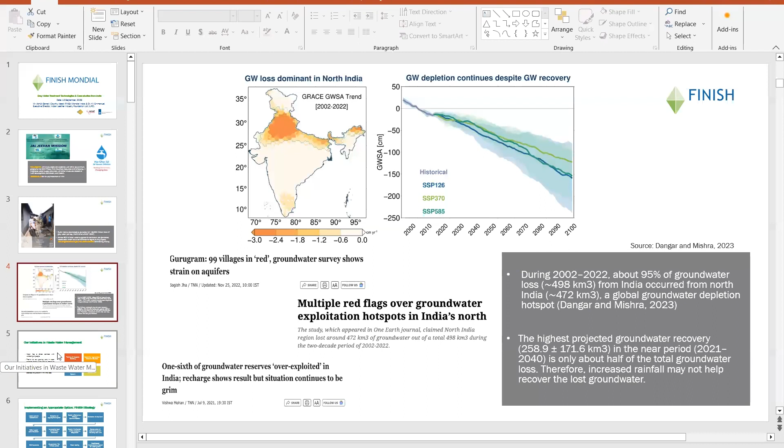This brings us to the point that this is, on the one hand, a problem, but also an opportunity for a development organization like us, Finish. With proper models and approaching the problem correctly, with the capacities and reach that we have, we can try to make some difference to the problem being faced.

So we have tried to develop some capacity building tools. We have been trying to approach this from an appropriate solution perspective. Our aim has been, and I'll quote Anand sir, from whom we have picked up whatever we know, that solutions have to be low maintenance. So we look at appropriate treatment systems, and I'll share some examples later.

Once these systems are set up, we also work on the operating and maintenance of these systems, so that merely getting the infrastructure in place is not good enough, but that it functions smoothly. Finally, we monitor the results by testing the end output, and sometimes it also requires tweaks and improvements so that the quality we get is as per the need of the customer.

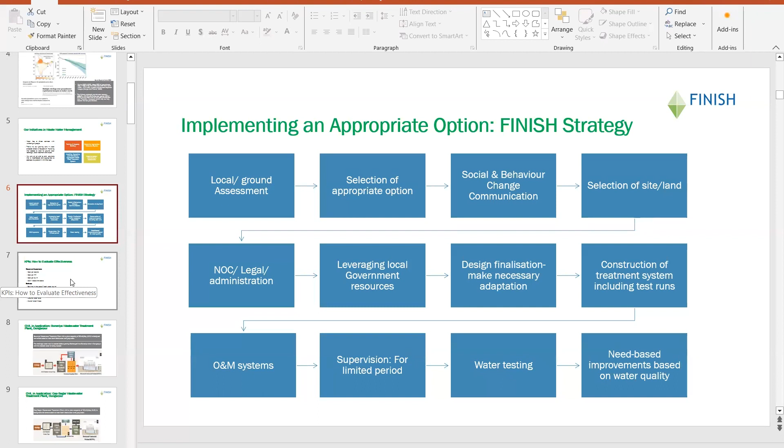We typically evaluate a project in terms of return on investment and end-use purpose. I'll elaborate particularly on this end-use aspect.

When we take up such initiatives, we try to see what the client is looking for - that is, what use the water is going to be put to after treatment. Will it be used for drinking, or for agriculture, or will it simply flow into a pond or a lake and over time get regenerated? The treatment systems we design try to keep these factors in mind.

Along with that, we also try to address the overall cleanliness and aesthetics of the project, because then the acceptability and maintenance of such units by the government and the community is much better.

This is one of the constructed wetlands that we did for Soneriya. This plant has a capacity of 50 cubic meters per day. This was one of our initial plants that we did for an urban local body - a very small municipality in Rajasthan.

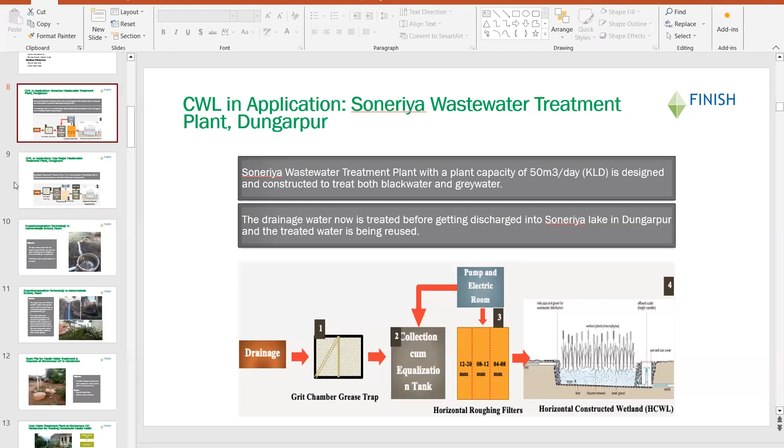Shall we move, Juhi, to the next one?

Gep Sagar was an interesting treatment system that we did. Here, when we tested the input water, we found it contained some overflow from a dairy plant. So the treatment system required some additional parts to be added. That's why, unlike the Soneriya system, which only had the equalization tank with roughing filters and horizontal constructed wetland, here we also added an aeration tank.

From there, the water flows into a secondary settling tank. And what we do is, on a periodic basis, transfer some of the sludge from the secondary settling tank back to the aeration tank to maintain the microbial load.

So this particular plant requires manpower to be present on a periodic basis, at least for this transfer of sludge, and a pump is installed for the operation of the aeration tank. So there is some kind of OPEX involved here - manpower is required.

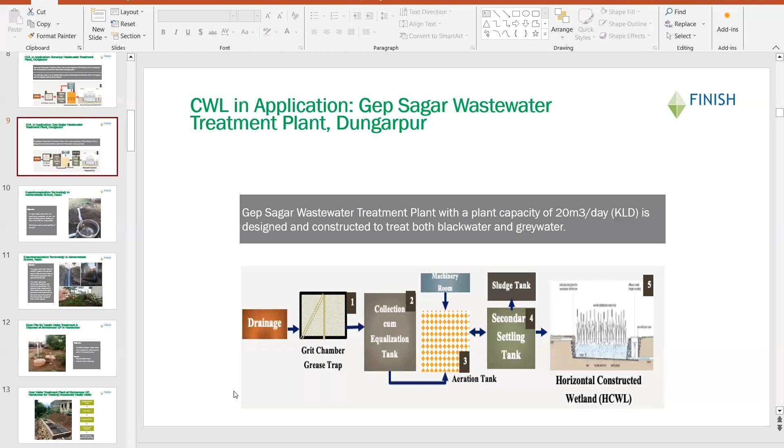Unlike the first one in Soneriya, where there is a pump but it's more easily maintained and operated - we managed to get a local shopkeeper there to help manage the operations - here, since it also entails transfer of sludge etc., the municipality had to put in manpower.

The very simple system that we did, this is a project that we carried out for the National Stock Exchange Foundation. This is a typical challenge that households in India face.

Wastewater from cloth washing stations and households tends to accumulate in most villages. So what we tried here is to put in small solutions. This is a residential school, called ashram shala, in Nasik, where we put up this particular small treatment system so the water does not accumulate everywhere, and gradually it evaporates.

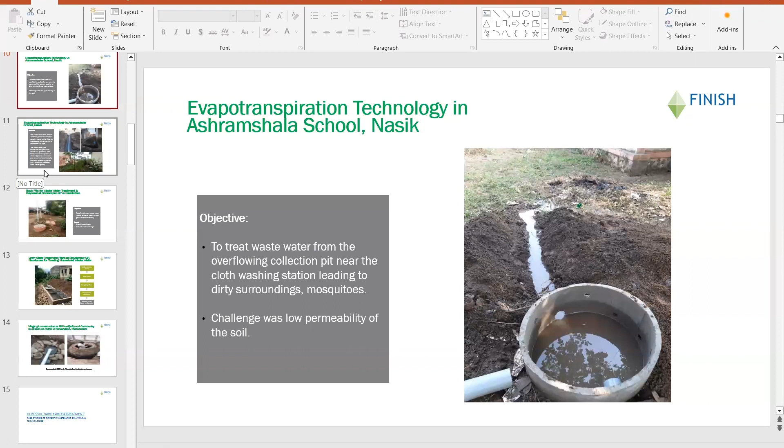Here again, the same technology: evapotranspiration, used in another Nasik ashram shala. You see the pipe, which is perforated. Since the soil there does not let water percolate easily - it's black cotton soil - the water flows out through the perforated pipe and spreads over the gravel. To aid the process, we employ water-consuming plants. Banana is quite popular and very effective, and since it also yields fruit, it's much loved by the community there.

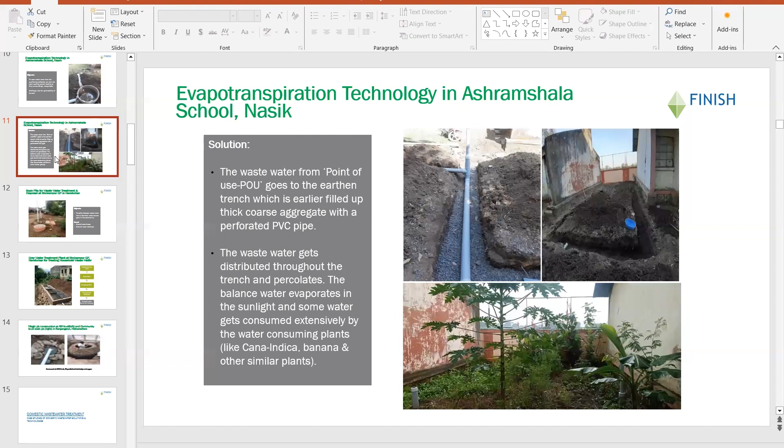Another solution, again in Nandurbar, where we did these soak pits for the hand pumps. With hand pumps, some water is always wasted and tends to flow all over the Gram Panchayat. So here we did soak pits, which take the water and ensure the area is kept clean.

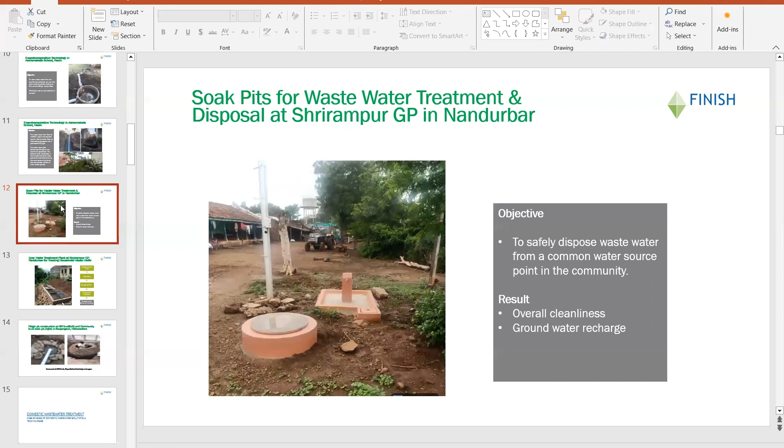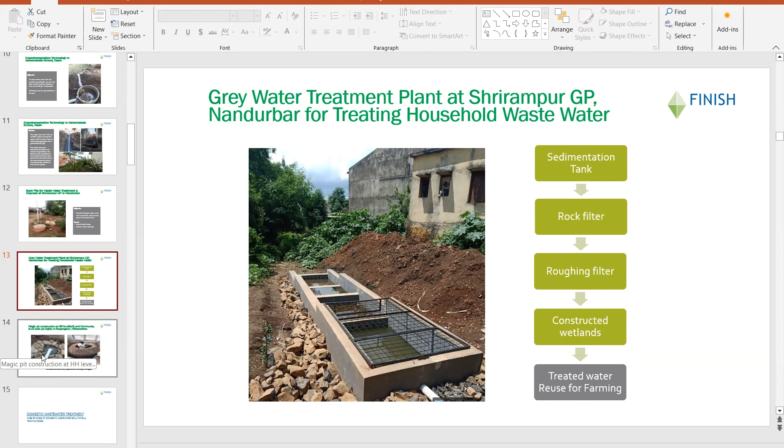Frankly, there's no magic about this, it's merely a soak pit. The idea is that community wastewater generated flows into these pits to keep the Gram Panchayat clean. This was done extensively in the project area, and under the new project - the Lighthouse Initiative - that most of my team members would be familiar with, all these solutions are quite popular and can easily be adapted in those territories.

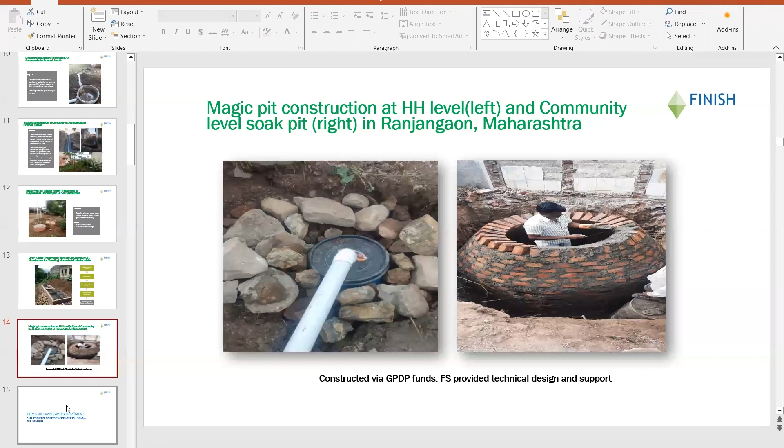I will take off from the point where Abhijit has already mentioned. Let's start with why this greywater reclamation is important - I will try to give a different perspective. As you all know, availability of water in India and in developing countries has become a major issue. We've noted that it is now a major criteria in purchasing property in urban areas. In many of our cities, locations with enough water fetch a better price compared to other areas, because water is getting scarcer and scarcer.

Many cities in India now have better coverage of sewerage networks, and I would say this has played a major role in higher water depletion. This may look controversial and paradoxical - on one hand we say we have a better sewerage network, an indication of development, but on the other hand I'm saying that has contributed to our water scarcity.

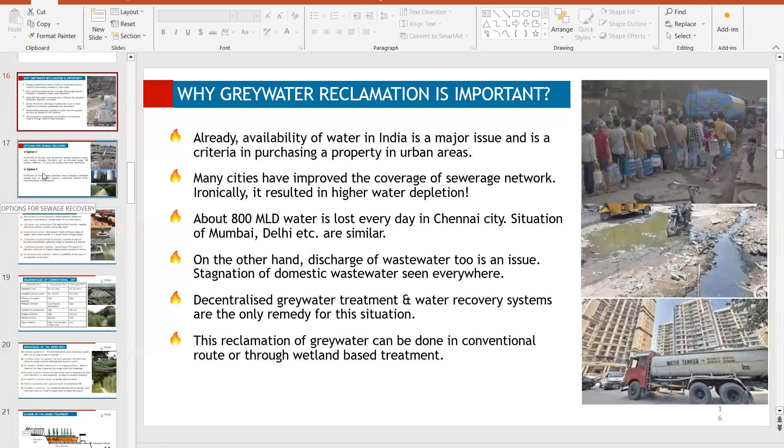So what can be the remedy? The remedy is that we need to somehow treat this sewage water and use it for groundwater recharge. There are two options. One is conventional treatment, where we have aeration tanks, fluidized aerobic bed reactor, or MBBR, and then use it back after disinfection. The second option is to go for nature-based systems using constructed wetlands.

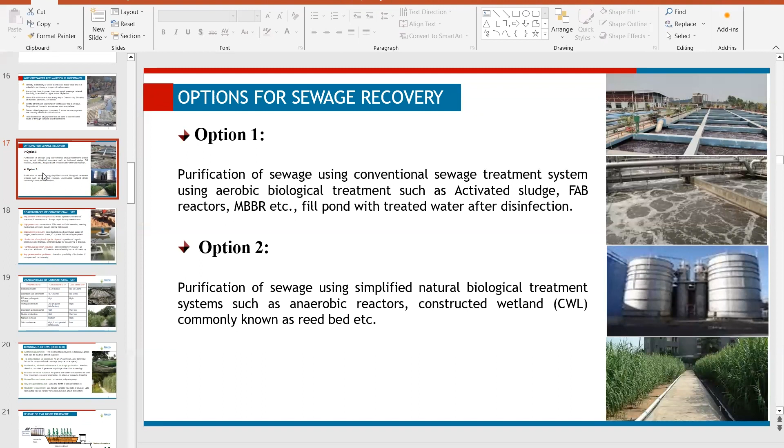So let me say, when I mention the disadvantages of conventional STP, I don't mean that conventional STP is bad in any manner, because as I mentioned earlier, most of my projects are conventional STPs. But when we talk about a decentralized level, it has a very big disadvantage, and I could see that about 80-85% of our sewage treatment plant network in India is not working satisfactorily.

This is what I discussed with our Honorable Environment Minister a month back, where we had a meeting in Delhi. He was also very concerned and showed a lot of interest in looking at appropriate solutions through nature-based systems. In fact, he wanted to try that at his place in Haryana as a model plant, which they are now currently discussing. So these are the disadvantages which we discussed.

One is that any conventional STP needs trained operators. You have to operate it completely on a continuous basis, 24/7. And also it needs aerators, artificial aeration, which means higher power cost. Another important point, which is more important in areas with power cuts and power failures, is that conventional STPs require continuous power.

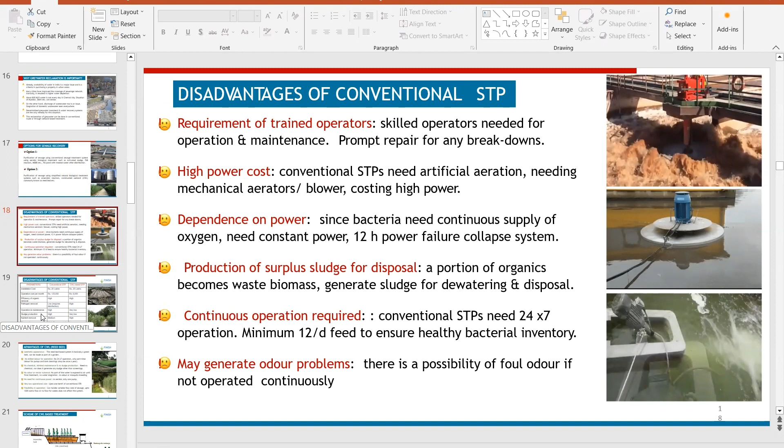If there is about 4 hours of power cut, then about 50% of the microorganisms we cultivate will die off, and it could create a major problem. About a 12-hour power failure will result in collapse of the system. So this was a major disadvantage when it comes to STP. It also produces some surplus sludge which needs disposal, and it of course needs continuous operation. And if it is not operated properly, it may generate odor problems.

So I was just saying, when we compare conventional STP with a constructed wetland-based STP, for a capacity of about 25 cubic meters per day, let's say conventional STP versus constructed wetland. The capital cost is similar, and maybe the capital cost of wetlands may be a little higher. But the operating cost difference, you could see, there is a big difference. It is only a fraction of that, and efficiency is high in both cases.

Another important point about conventional STP is that it is very poor in removing pathogens. In fact, we use cultivated bacteria in conventional STPs, so most of them need disinfection afterward. Whereas with reed beds - I may use 'reed bed' in place of 'constructed wetland' because that's a term we use very frequently - the pathogen removal is pretty high and operation maintenance is very low. The sludge production is also marginally very little, much lesser than conventional.

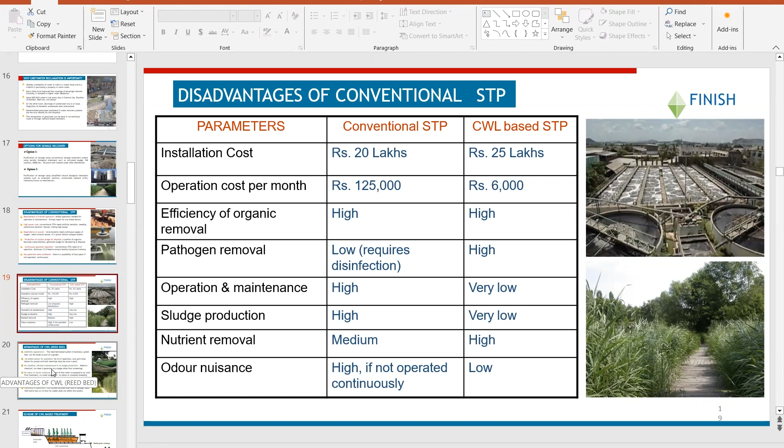And it has a high removal rate of nutrients, especially nitrogen and phosphate. This is important when the wastewater is discharged into a lake, pond, or river, where the nutrients can create eutrophication. So the reed bed is a better solution for that. And of course, there is very little chance of odor nuisance from the reed bed.

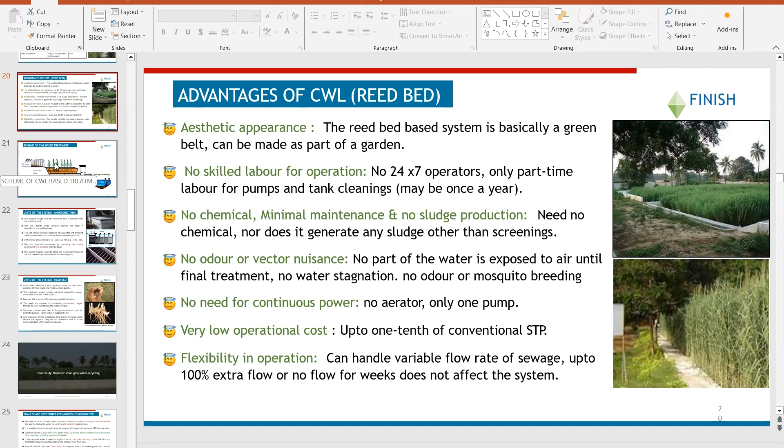Also, suppose there is a flooding, like in Chennai some 3-4 years back when there was a big flood. Many of our sewage treatment plants became out of order at that time, whereas the reed beds we constructed continued to function. For about 2 weeks it was underwater and nothing happened to it. So it is much more flexible compared to the conventional plant.

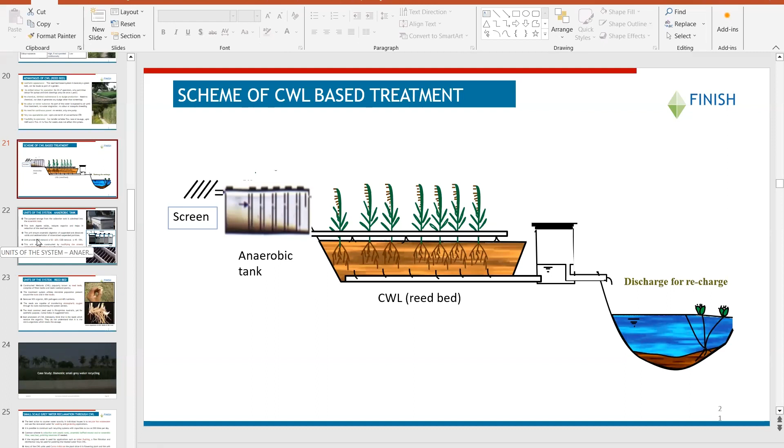So the units, as I mentioned, the first stage after the screen can be an anaerobic tank, which essentially digests the solids. The solids settle in the tank, and over a period of time they get digested.

In a normal septic tank, you need to remove the sludge maybe once in 5 or 6 months. Whereas in this kind of unit, it may take something like 2 or 3 years before you need to remove the sludge, because it gets digested over the period. The unit usually provides 50 to 60% removal of BOD and about 45 to 55% of COD.

And you can modify the already constructed civil structure, which is basically the septic tank. You can construct it as an extension.

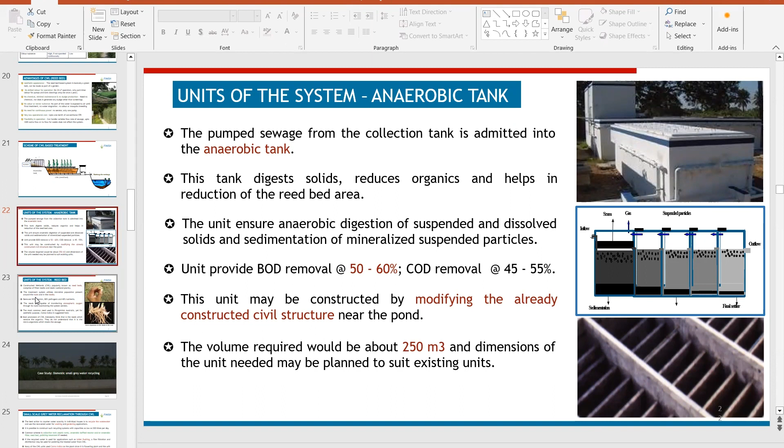The reeds are generally capable of transporting atmospheric air; through its roots, it can disperse into the water. Because of that, some aerobic condition can be maintained. We can say it is a natural aerator without using any power. It supplies some oxygen through its roots, and bacteria grows around those roots and the media.

The reed normally used, which has got the highest efficiency, is an Australian variety called Phragmites australis. But in many of our plants, we also used a flowering plant, Canna indica, which is used mostly in gardens.

One thing I would like to stress here is that many of the people who promote the reed bed also have a misunderstanding. They think that the pollution is removed by the reeds, like any plant absorbing organic matter, and that is how the water gets treated, which is totally wrong. The actual absorption of nutrients and carbon, that is organic matter, into the reed is only 10% of the total BOD and COD removed in this system.

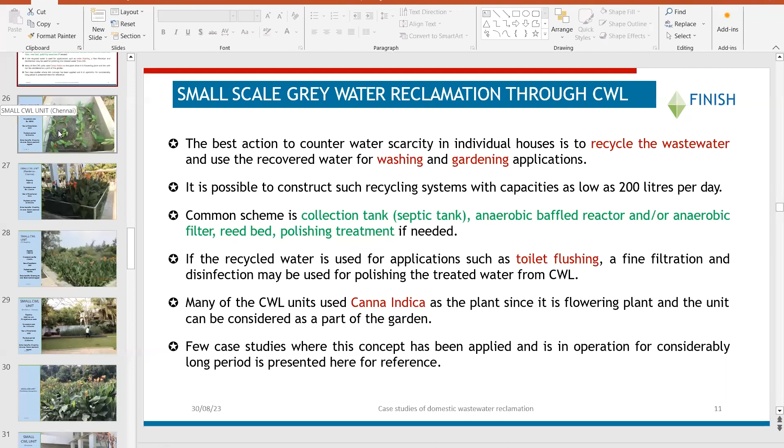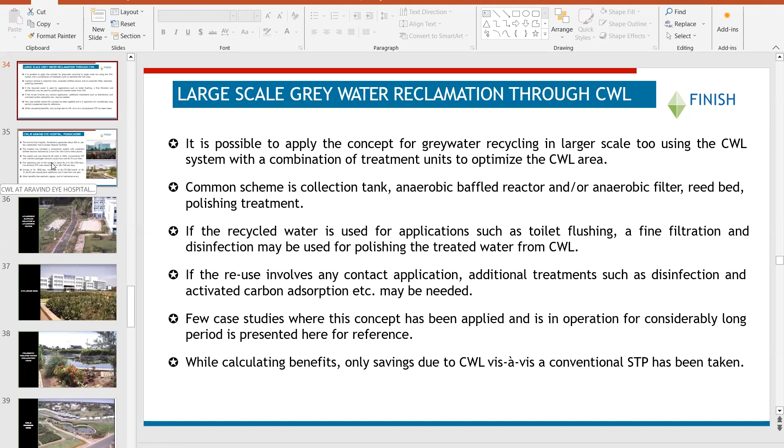Now let's look at case studies for large-scale greywater recycling. It has the same basic scheme: a collection tank, a baffle reactor, a reed bed, and polishing treatment if the use involves contact application like washing. The application proposed for Haryana by our Honorable Minister for Environment, Mr. Bhupendra Yadav, was to use this water for a temple pond where people wet their feet. In such a case, I suggested there may be a need for disinfection; otherwise we can use it as is. I'll give a few case studies, again operating for a minimum period of 10 years.

The first one is Aravind Eye Hospital in Pondicherry. It is a very large plant in terms of reed beds, treating 450 kiloliters per day of wastewater. One of the reasons they wanted to go for it is that there were no proper disposal facilities for sewage from the hospital, so they wanted to reuse it. They went for a constructed wetland of about 2 acres with Canna indica as the plant.

You can see it in the first picture. The unit was installed in 2004 at a cost of about 90 lakhs, whereas a conventional plant would have cost about 70 lakhs for the same purpose. The operating cost for this plant is about 3 rupees per cubic meter, whereas a conventional plant would cost about 16 rupees.

That means a saving of about 5,850 rupees per day, which translates into 1,75,500 rupees per month, or 21 lakhs a year, meaning the payback of the additional cost was done in less than 1 year. This was commissioned in 2004, and it has a much better aesthetic appeal.

One important point about this plant is that it was inaugurated by the Honorable President of India at that time, Dr. Abdul Kalam. Kalam was actually a faculty member in Anna University before he became president, and I was maintaining close touch with him. So when I mentioned this project, he offered himself to inaugurate it, and he did.

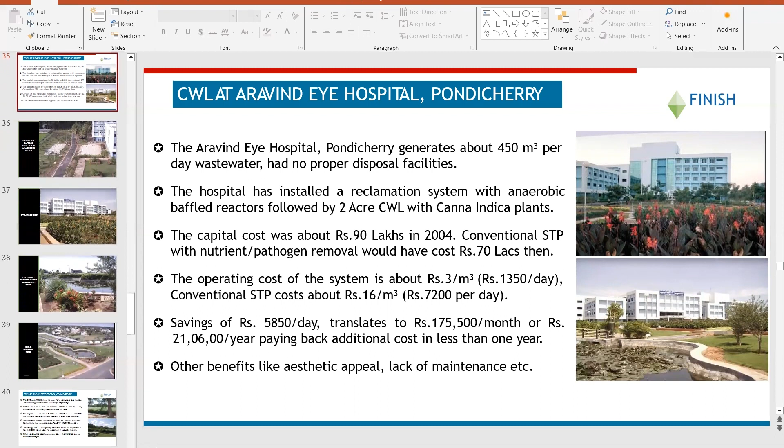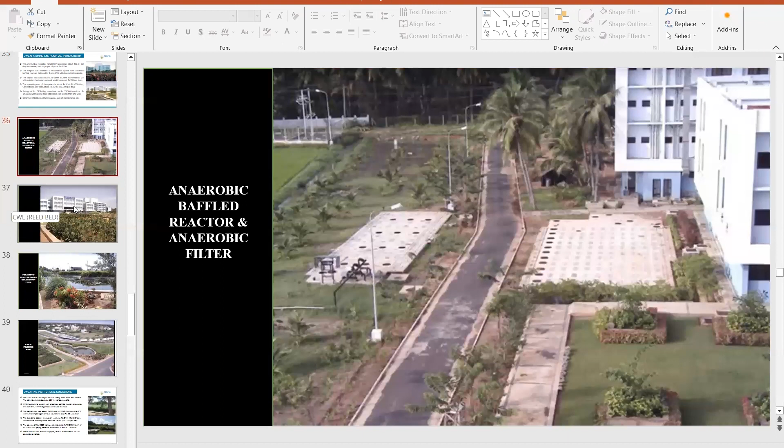Next slide, you could see a few photographs of the thing. This is a photo of the baffled reactor. You could see all of them have been constructed underground, where they use this space as a parking ground, so there is no loss of space.

This is another institution called RVS Institution in Coimbatore. They have engineering colleges, a dental college, and many others, and they have hostels which were generating about 150,000 liters per day of sewage. They wanted to reuse this water, so we went for a reed bed system where Phragmites australis was used as the reed, because it's at the backside of the hostel. The cost was about 60 lakhs.

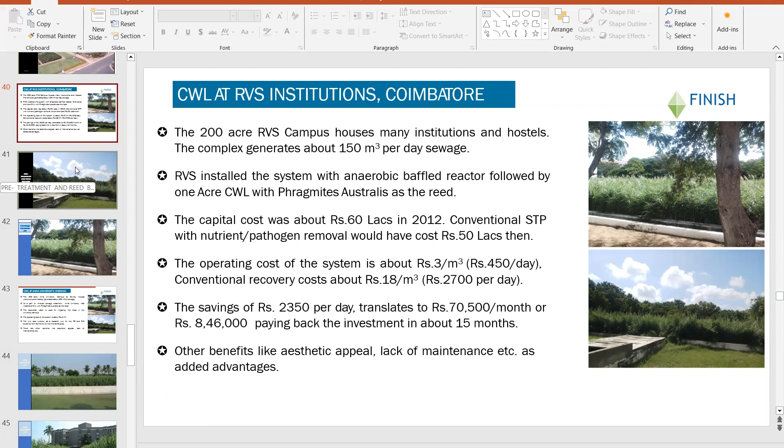This is an overall look of this thing. You could see it all looks like a kind of forest area, but it is not a forest area, it is in the middle of the city. You could see the reed there is the Australian variety, Phragmites australis.

This is again another view. You could see how dense and lush that growth is.

I will also mention another reed bed, which is there in the university where I was working earlier as an advisor.

That is how Dr. Kalam got involved in this, because I worked as his successor in Anna University as a technical advisor for some time. During that time, we wanted to reuse the sewage, and we put up this unit. The Anna University campus generates about 300 cubic meters of sewage, and we were recovering about 100 cubic meters using this reed bed system, at an operating cost of about 3 rupees per cubic meter.

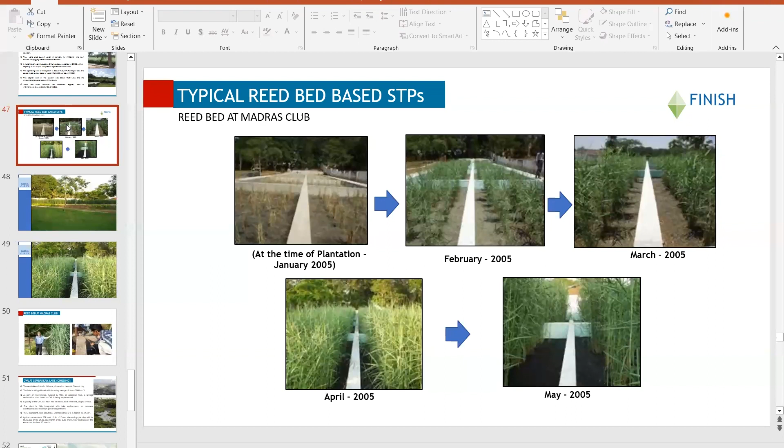This is the close-up view of the reeds, which is again growing very lush.

I will finish off these case studies with one project which is now ongoing, the purification of sewage which comes into a lake. The lake is called Sembakkam Lake, in the heart of Chennai city. The sewage coming to the lake is very high, almost 7 million liters, 7,000 cubic meters per day.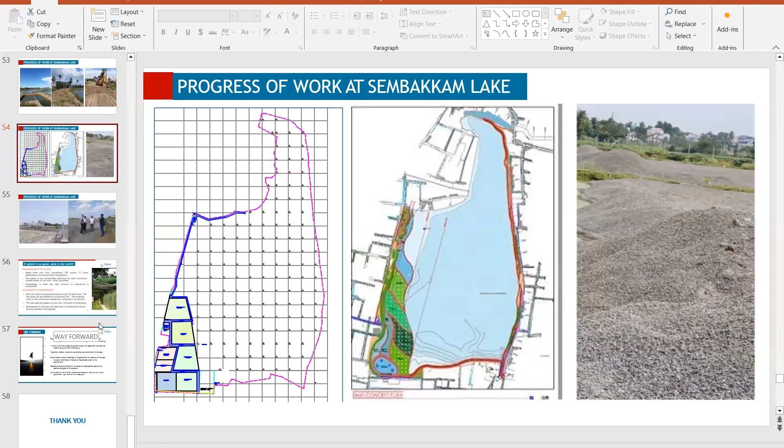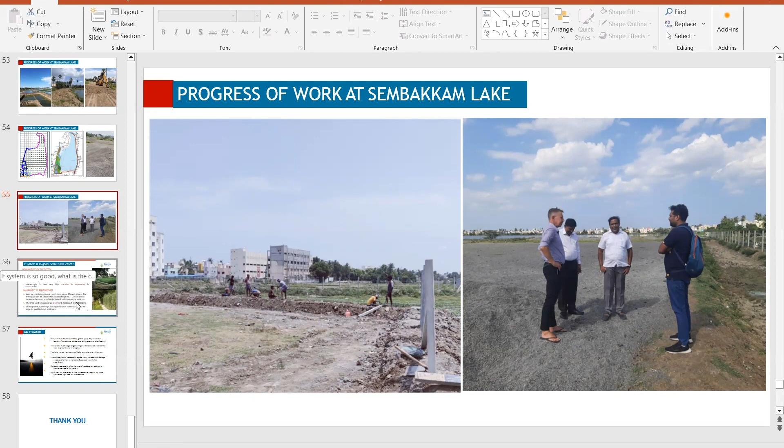Here you could see Valentin coming and inspecting this place, about a month back. Valentin, the first set of reed beds are ready for planting. We are going to plant it next month, and maybe by November we expect this plant to be commissioned in full.

So now one question which could be in your mind is, I was saying that all these units were operating for more than 10, 15 years. It has got all the advantages you can think of: very low operating cost, low maintenance, no smell, easiness of treatment, very high efficiency. Then why is it not so popular?

There are three major disadvantages of this. One is that it needs much more area, about 3 to 5 times that of a conventional STP. The major reason it is not popular is that it is not attractive to most of the contractors who are constructing sewage treatment plants. Basically this is having only civil work, so any civil engineer from the client side can estimate and say what this cost should be.

Whereas in a conventional STP, what happens? The contractor supplies some pumps, some aerators, gives a bill, and nobody questions him. In this case, they will say, why is it costing so much? In fact, I was witnessing one case where a client was saying, you have supplied some stones and some wild plants, and for that you need 30 lakhs. What is this? The same guy would have easily given 30 lakhs to a conventional STP contractor without even batting an eye. So this is one disadvantage: most contractors of sewage treatment plants don't want to supply reed beds.

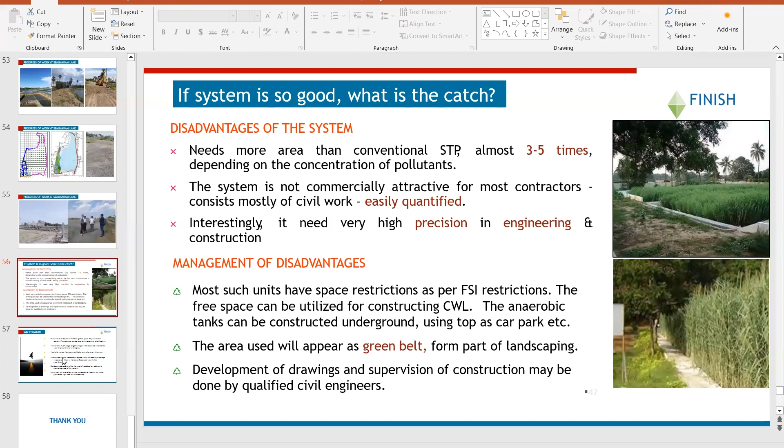So what is the way forward? In my opinion, every individual house should have this kind of decentralized system, because not only can we use the water for irrigation and toilet flushing, you can be assured that your groundwater table will always be maintained. I could give you one example from my house.

I have been staying in that house since 2003. I have never seen the groundwater table going down, irrespective of the fact that my neighbors still use water in big quantity. I still maintain the quantity because almost the entire water was coming back. And if there's not much usage for gardening etc., you can use it for groundwater recharging.

And hotels or hospitals can use it for toilet flushing, etc. This is a good option for recovery of sewage because of obvious advantages like no power, chemical, or manpower needed. It also adds to the aesthetic appeal.

So let us all try to make an effort by putting up this recycling system through this kind of a system. I believe Finish will always take it up as a champion of this kind of system. Thank you so much.

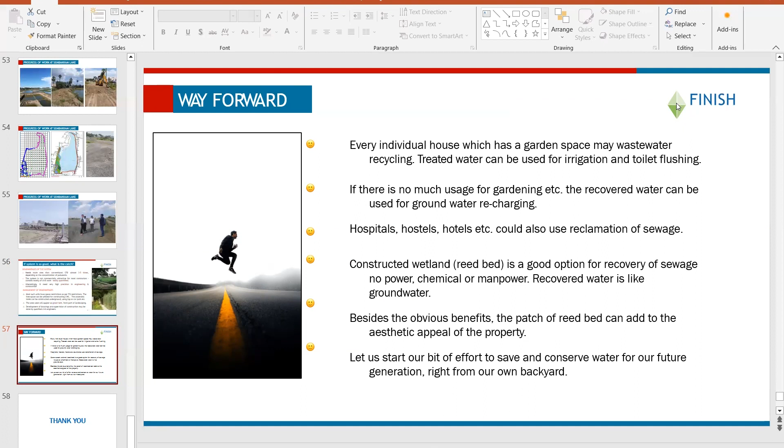Thanks. Maybe it's always nice to be the first. I have a couple of questions for you, Emmanuel.

Number one is on using nature-based systems compared to conventional sewage treatment. Next to the savings you're talking about, there's a climate impact, right? Have you ever tried to get the CO2 savings for a nature-based system? Have you compared it with a conventional treatment system? And what is the ballpark figure? You give nice figures for O&M, and for investment. So that's the first question. I'm just going to ask three.

Number two, and again I find it very fascinating, you talk about reed beds as being an excellent way of getting rid of eutrophication. Now, the few times I go into a village in North India or Bangladesh, most of these village ponds are very green, meaning the eutrophication levels are pretty high. So it could be a very good treatment in that sense. But what would be your suggestions for O&M? Because it is a low maintenance system, but not a no maintenance system. So what would be your ideas?